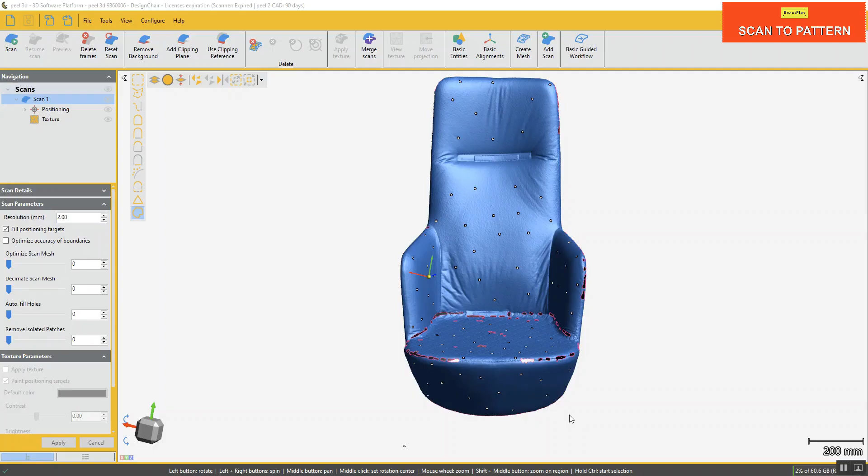Welcome to this video in which I'm going to show you how to take a scan from your peel scanner, send it over to your peel 2 CAD software, and then send that information over to your ExactFlat software.

So first of all, I have my scan here, but before I send it over to peel 2 CAD, I'm going to decimate my scan mesh, which is going to allow the smaller triangles to become larger in areas where I don't need as much detail. In other words, the triangles are going to be larger and there's going to be less triangles, which is going to reduce my file size by a lot.

Okay, so now that it's done, I am ready to send it over to my peel 2 CAD software. In fact, I can even delete my scans, and then save this as a different name, underscore P2C for peel 2 CAD.

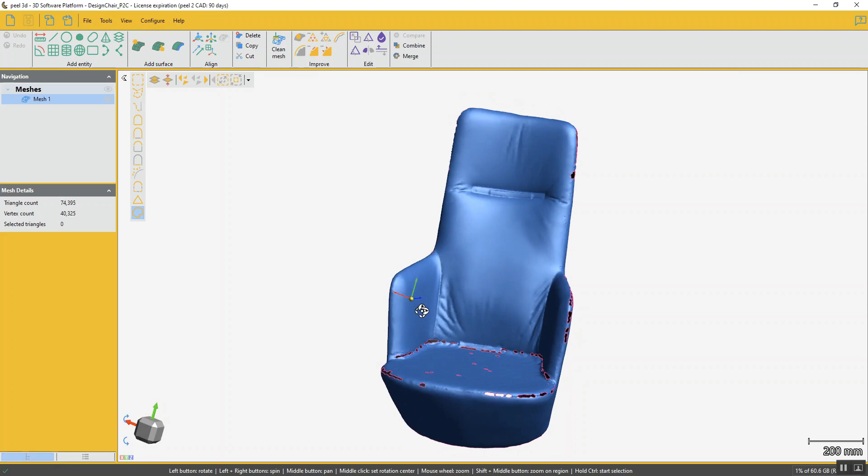Okay, now that I'm in my peel 2 CAD software, I'm going to first clean my mesh. This column is showing me all of the triangles that are affected by different things I can fix, like spikes, narrow triangles, and creased edges.

If I'm ever not sure what any of these mean, I can click on the help section, and it's very useful for when you're doing a certain action. Here I'm cleaning the mesh, and right here it talks about different things on how to clean the mesh.

Okay, so I'll click on apply, and then OK.

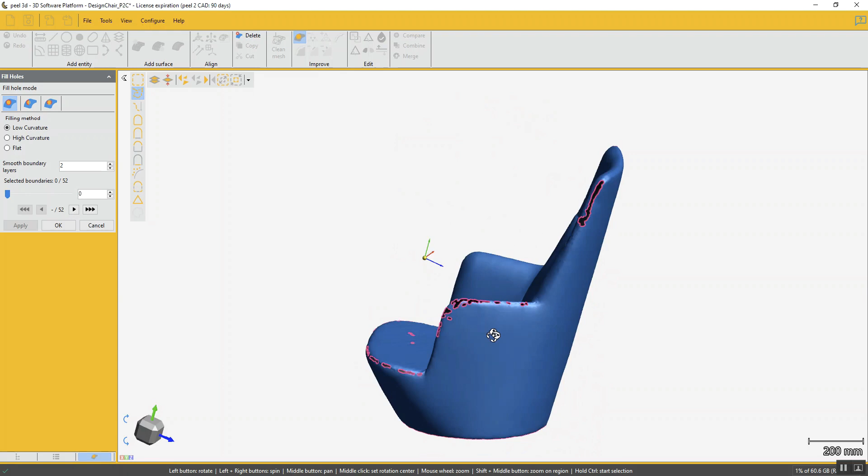Next thing I'm going to do is fill in these holes. So I can click on fill holes, and it looks like I have 52 holes that I can fill. Now if I move the slider bar, it's going to fill in the smaller holes first, and those are indicated by the yellow holes. As I go higher and higher, I'm filling in more and more of the holes. I don't want to fill in the bottom one, because I'm going to be using that later for my alignment.

So I'll just click on apply, and then OK.

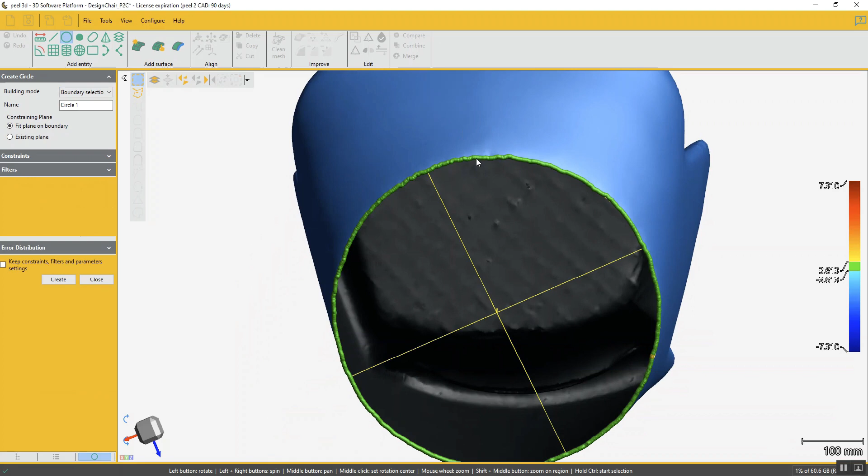All right, so next thing I'm going to do is create a circle to use for my alignment. And I'm going to use the building mode of boundary selection. Then I just click on the boundary or the edge of the scan, and click on create.

Next, I click on plane to add my plane. I'm going to use triangle selection for my building mode, and then boundary selection for my selection tool. When I use boundary selection and click on that boundary, it highlights a row of triangles along that boundary, so those are the triangles I'm using to create this plane. In other words, the circle is going to be on that same plane, because that's how I made the same circle using the boundary.

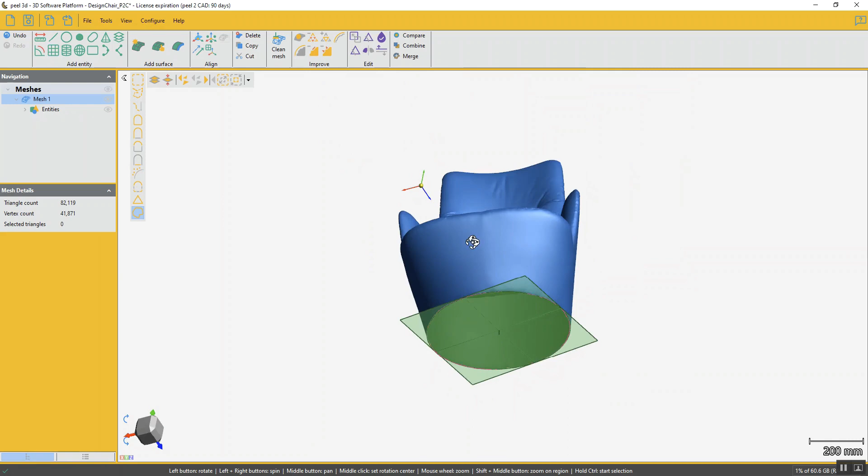All right, next thing I would do is create a line of symmetry or a plane of symmetry. I do that by going to plane, and my building mode this time is going to be mesh symmetry plane. My options are to either choose plane 1, which doesn't really make sense here, or draw a line or pick 3 vertices. So I will draw a line approximately down the middle, but the software is going to do the rest of the calculations using the rest of my scan.

Okay, so that yellow plane is actually where my symmetry plane would be. I can click on create and then close.

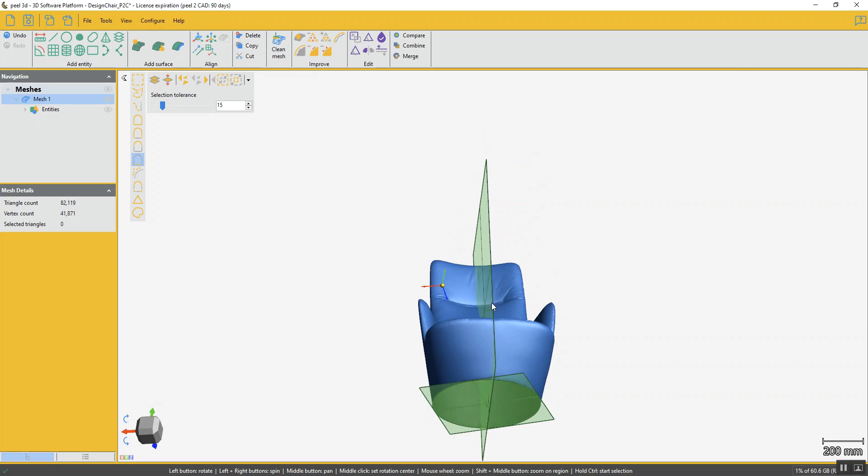All right, so now that I've made my circle and my 2 planes, I'm going to move my origin down to the bottom of the hole. I do that by clicking on Align to Origin.

And then I restrict different entities. So my circle 1, I'm going to use that as my origin XYZ. Then my plane 1, I'm going to use that as my plane XY. And lastly, my plane 2, I'm going to constrict that to my YZ plane.

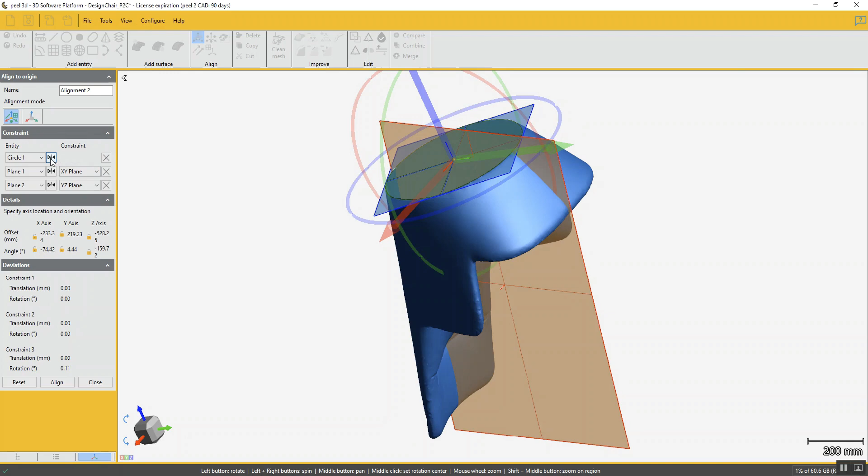Now, as you can see, my part is kind of upside down. I want my Z to be pointing the other way, so I can click on the flip button here under circle 1. Oh, and I can't actually, because that's the origin XYZ, but I can click my XY plane to flip that, and then my plane 2 to flip it the other way as well.

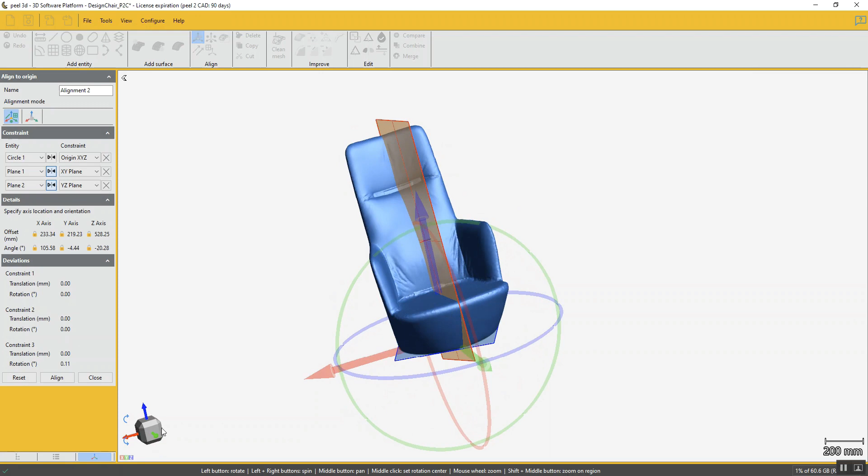Okay, so now at this point I can use my cube to be able to see different points of view, and that's going to be really useful for when I'm cleaning.

All right, so at this point, I'm ready to start cleaning my mesh a lot more. There are certain things I know for sure I want to clean up, like I don't want this little indentation here. So I can use my rectangular selection, hold down the Control key, and click and drag. Then I click on Defeature, and that smooths that out there.

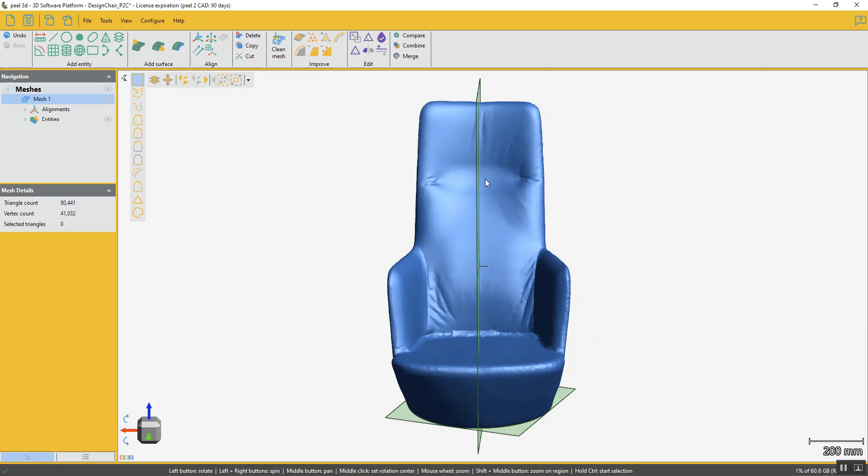But I still have little wrinkles here and there that I want to fix, so I can go bit by bit highlighting them everywhere. Keep in mind that the larger ones you highlight, there's going to be a little bit more issues and it'll take a little bit more time. So you want to do them bit by bit.

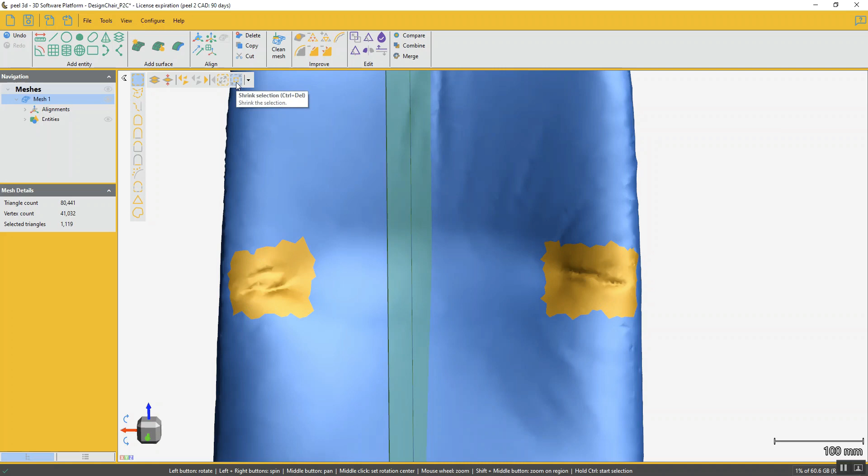Also, I don't know if you saw when I clicked on Defeature, it said irregularities were found within the selected part of the mesh. This is very common, especially when you have a blue triangle still hiding within your selected area. To fix that, just click on the Grow Selection tool, and then you can shrink it again if you wish to. You click on Defeature again, and it works the second time.

So I'm going to go around highlighting different regions, just smoothing everything around here. Now you can either use the paintbrush selection tool, which is what I'm doing right now, or you can use the freeform selection tool.

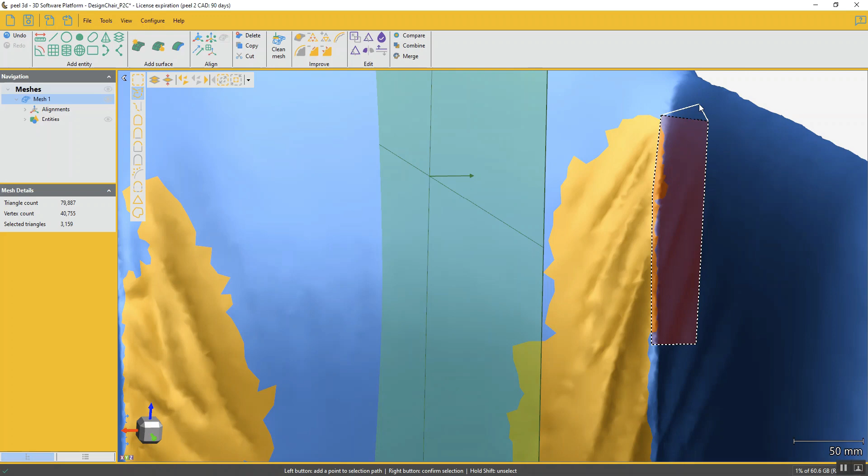I'm going to make sure I don't highlight my corner here, and I do that by hitting Control and Shift at the same time. While holding those down, I do my left click everywhere where I want to unselect. Before I let go of Control Shift, I do a right click. So I can hit Defeature, and it's much smoother there.

Another way to clean things up is by creating holes and then filling them in depending on their form. In this case, I'm going to use the similar normal tool, and I'll click on this planar area of the bottom seat, and it says unable to create selection with current vertex. In order to allow it to select that region, I'm going to raise my tolerance up, and then it's selecting this region. The reason it wasn't selecting before was because it didn't consider it very planar-like until I eased up on it.

I still have some blue regions here that I'm also going to want to delete, so I can just grow that selection, and maybe just a few more just to make sure, and then I can shrink them back down.

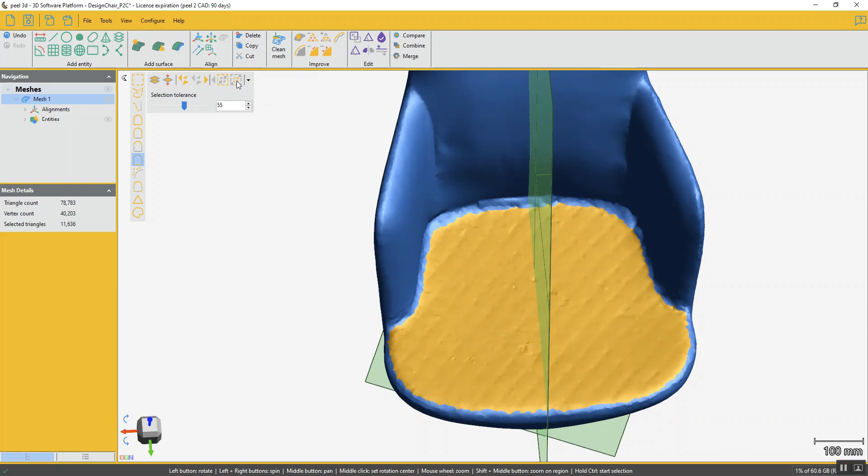Now in this case, I kind of just want to select the flat region, but I do want to select it all the way back to the edge here. So for that, I'm going to use my freeform selection tool and highlight a little bit more around here. And it looks like I highlighted too much. I hit Control and Shift and just deselect once again, right click. And now I'm ready to delete.

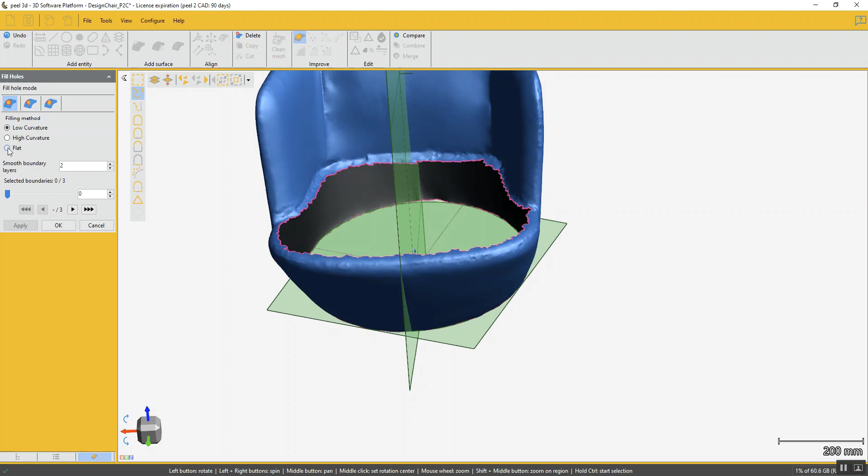I can also hit delete on my keyboard as well. So if I want to fill that hole, I can either do it with low curvature, high curvature, or flat method. I'm going to choose flat since I do want this to be pretty flat there, and I click there. It gave me a smooth boundary layer of two layers, which means there's about two rows of triangles in which it blends in. But I actually don't want to do that, so I'm going to hit undo, and then I'm going to go to 0 here. You can play around with that number and see which one fits your need best.

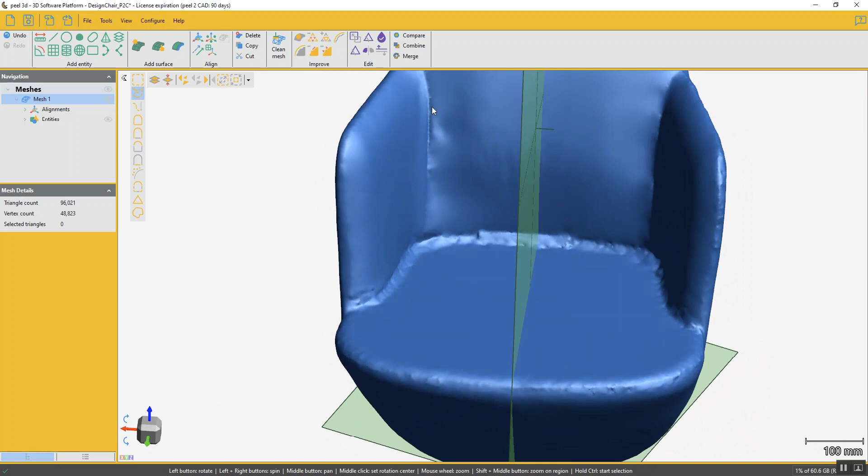So now I'm ready to clean up a little bit more around the corners here, because when I cut these pieces into different fabrics, I'm going to want to make sure that I have a nice smooth cut right along here. But as you can tell, it's a little bit wrinkly.

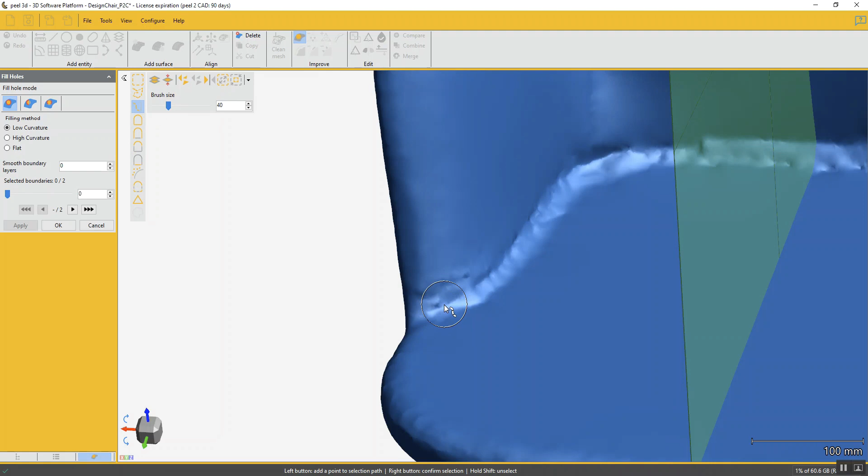So in order to fix that, I can go to my Fill Holes tool. Even while I'm in the Fill Holes tool, I can still select certain regions, so I'll use my paintbrush selection tool. Holding down the Control key and scrolling up increases the size of my paintbrush, so I bring it to a size that makes sense there, and then I highlight the regions that I'm about to delete.

If at any point this plane gets in the way, or you don't want to see it anymore, you can click on your project tree, the drop-down arrow for entities, and then hide your plane 1, plane 2, and circle 1. You can also hide them or show them all by opening the entity's eye.

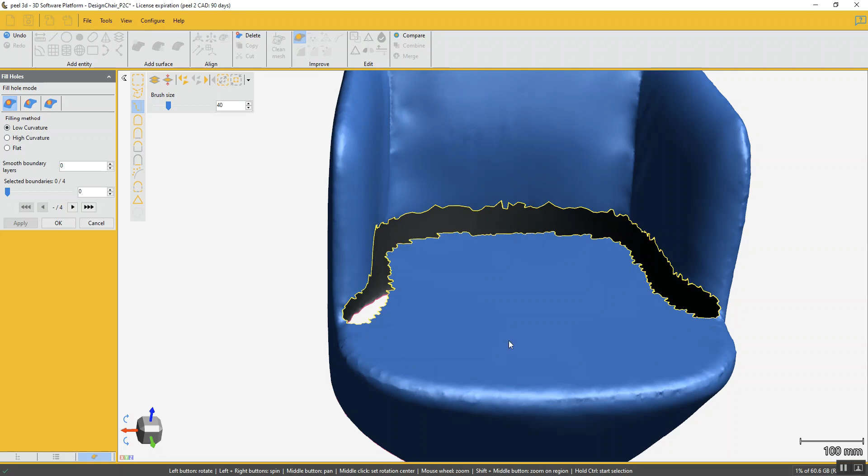Okay, so going back to my filling holes tool, I can click on delete, and then I'll use low curvature to fill in this hole. So there it's much smoother than before, with a little bit of stuff I can still fix.

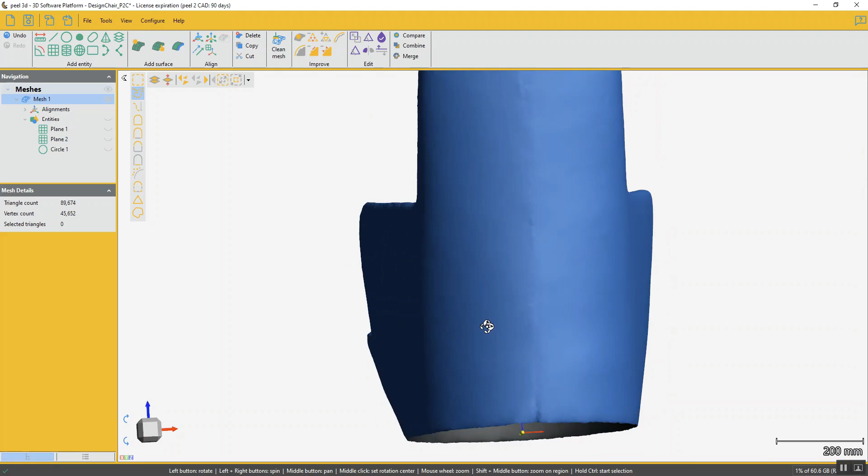So I can keep on going around and doing a bunch more defeature tools. I'll use my freeform selection for that. And I want to make sure that I do the same thing for the zipper in the back.

Now notice when I do these defeatures, I'm trying not to make them super giant. That's because with the larger a defeature selection you've made, the longer you're going to be waiting.

It's a little hard to see, but there is a little seam that was here as well, so I'll defeature that too.

And it's starting to look pretty smooth now.

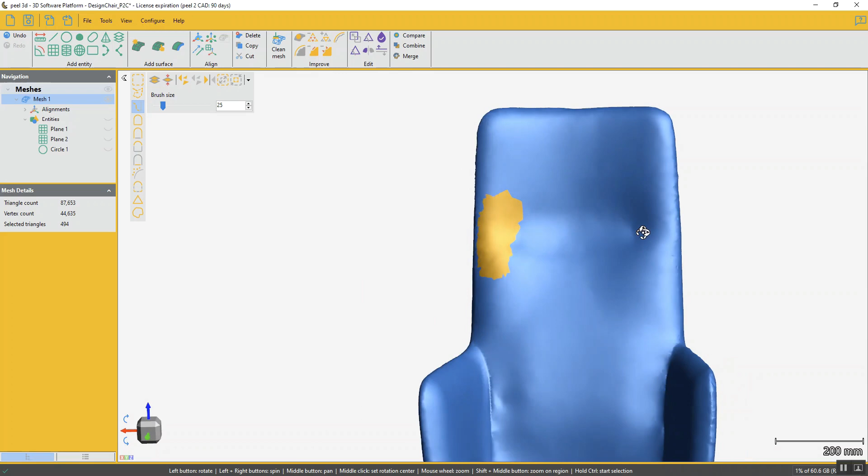Now I do know that I'm going to also want to smooth out right along here, because that's where I'm going to cut part of my cloth. So I can either choose defeature or fill holes. You can play with each one and decide how you want to do it.

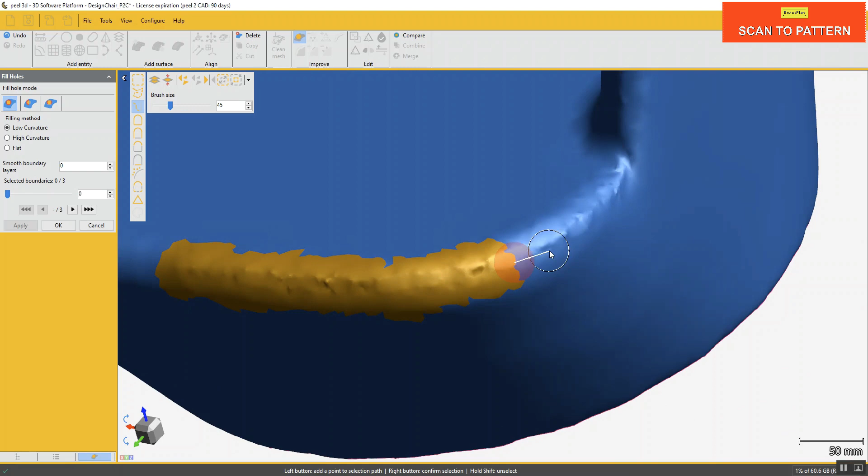Let's say that you're in the middle of clicking with your paintbrush selection tool and you realize you don't want it to be that thick, you want it thinner. You can actually hold down your control key and scroll down on your mouse, and it makes the paintbrush thinner there.

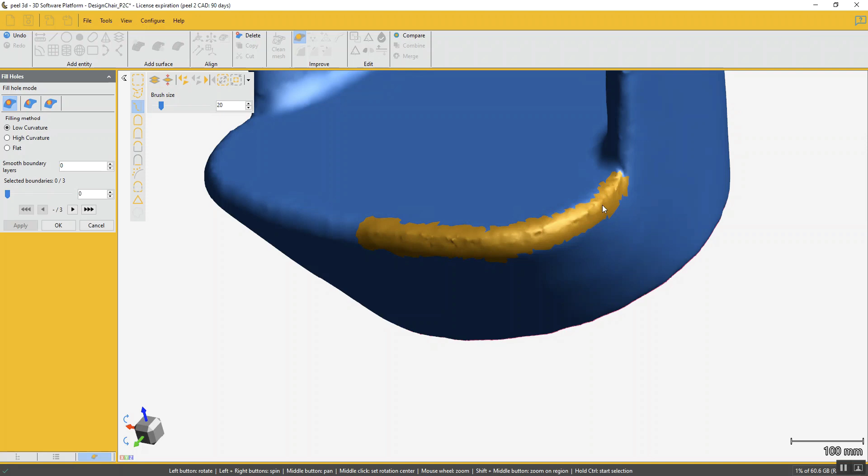So the rest of the stuff I think I'm going to do with the defeature tool.

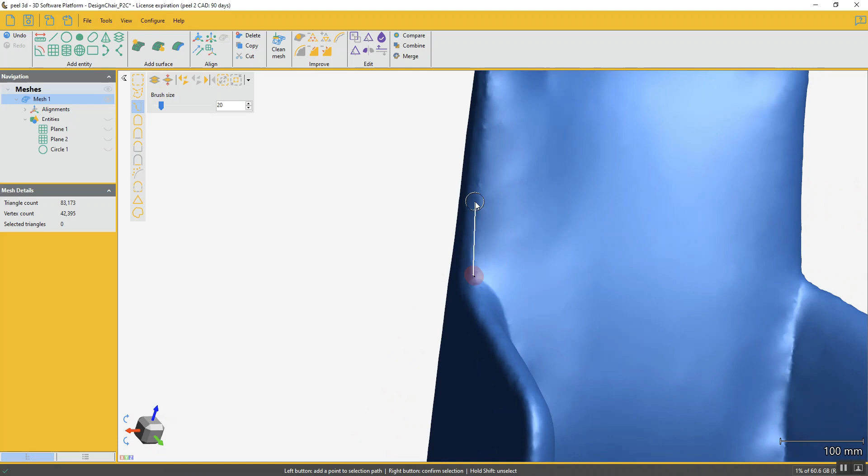Now, if at any point you think that you've lost some information, you can always click on undo and then try your hand at it again.

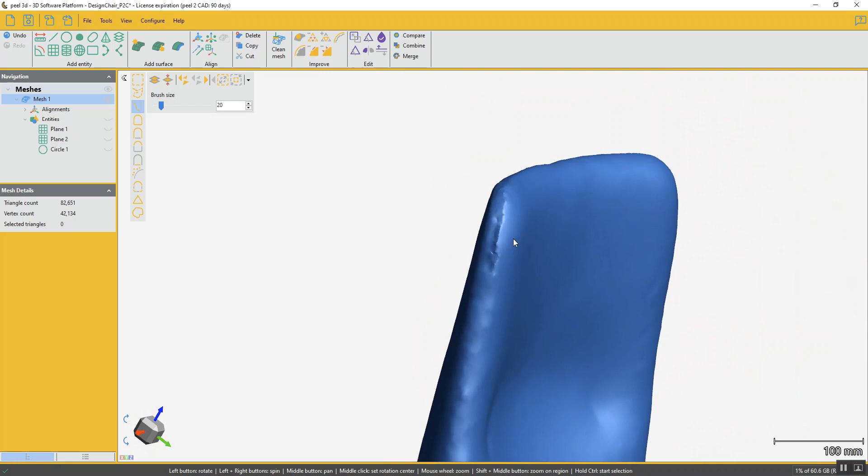And if you're not sure, you can also use this tool called compare, and you can compare to before defeature, so you can see by how much it's varying. This blue represents a negative number, showing that you have less material, or negative material, than what you used to have before.

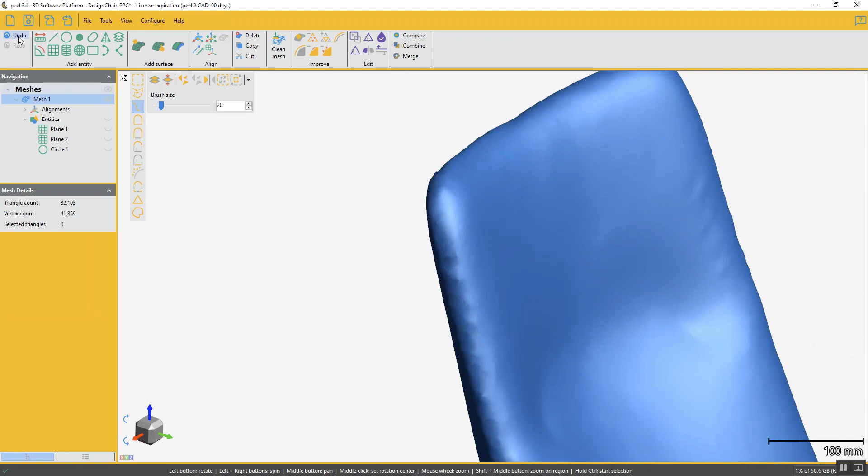So if you feel like that number is a little too high, you can close it, click on undo, and then just fix your selection again.

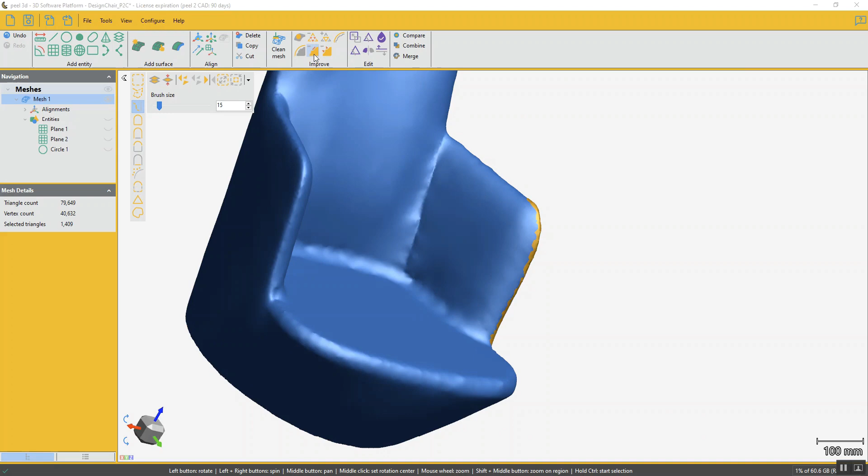Looks pretty smooth now. Just be sure that wherever you're going to put your seam has been defeatured and is nice and smooth.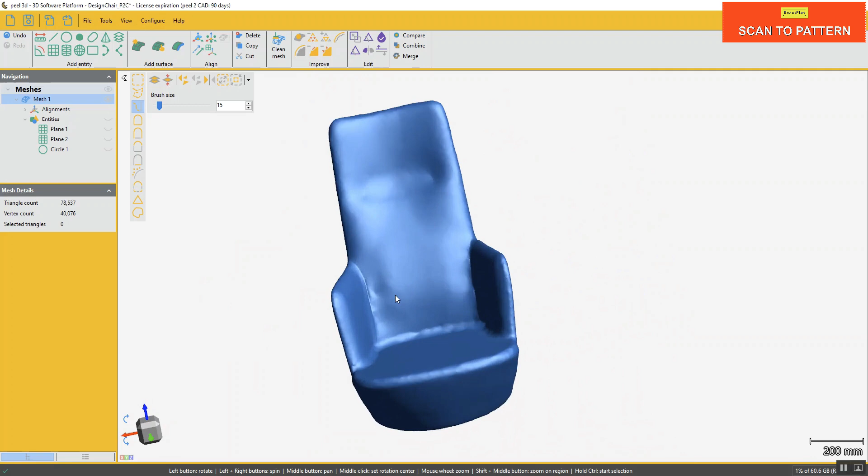All right, looks like we're still missing some smoothness here and here.

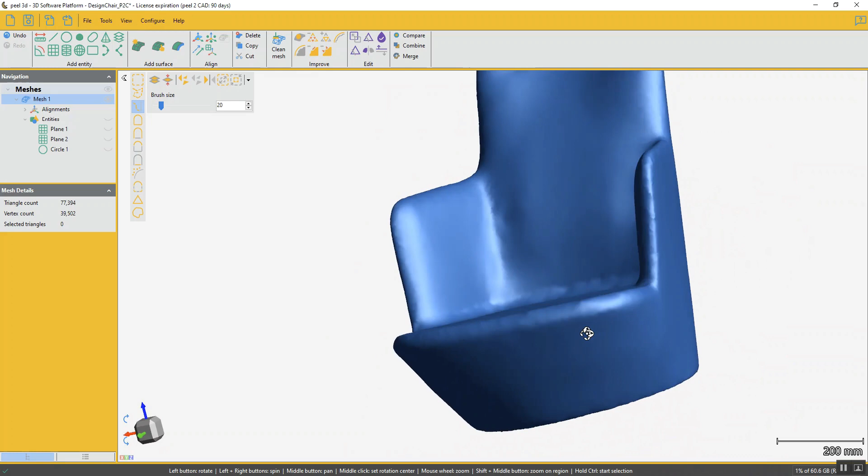Okay, looks pretty good. At this point, we can also do a smooth mesh.

So I'll go all the way up to 100. I'll allow my max deviation to be 0.1 millimeters. And just to better see what's going on, I can click on triangles and wireframe on my display. The deviation might be so slight we might not even see it, so let's see what happens here.

We'll click on preserve boundary, and we'll click on apply. So it was either already smooth, or maybe I already did it and didn't remember.

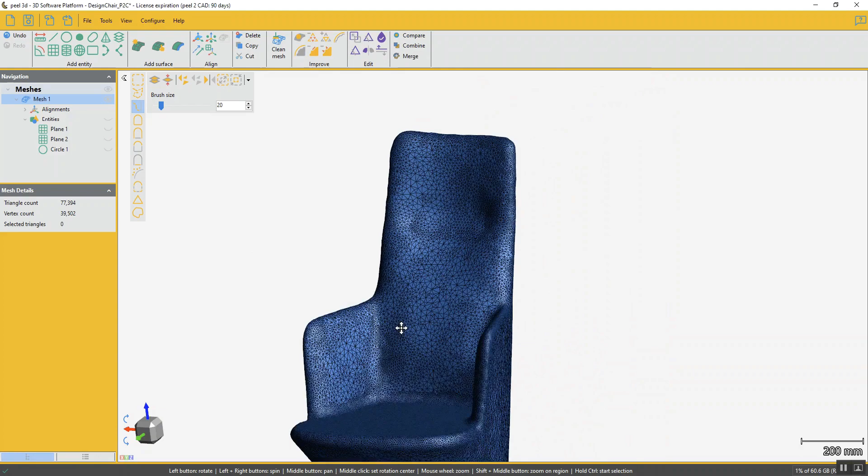Also, I know that I'm going to want to make this boundary at the bottom nice and smooth, and I know it's pretty circular, so I can actually edit it so that it becomes a perfect circle. I can do that by clicking on Edit Boundary, and then choosing Fit to Entity.

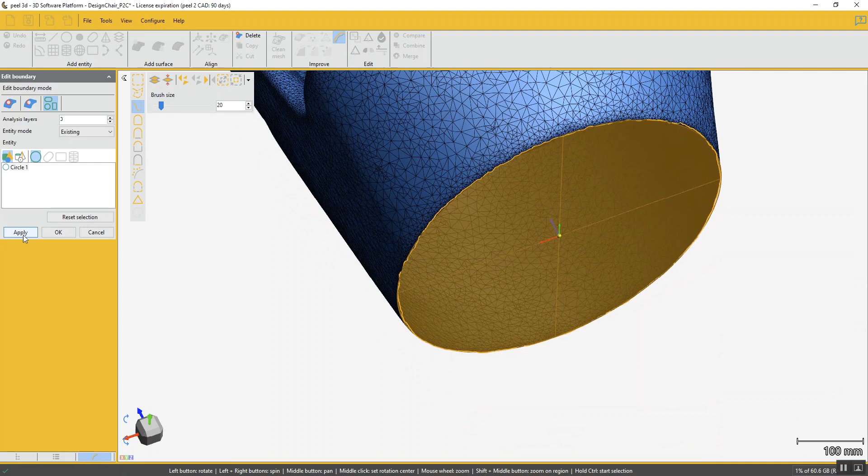Either I can use this boundary as my circle, or if I've already made a circle before, I can choose that circle to make my boundary fit to that entity. So if I click on apply, then that circle or that boundary becomes a nice smooth circle.

Okay, so now that I've smoothed a lot of things out here, what I'm going to do is, well first off, I can see that I have about 75,000 triangles, which is a good amount of triangles for my ExactFlat software. So at this point, I can start cutting my chair.

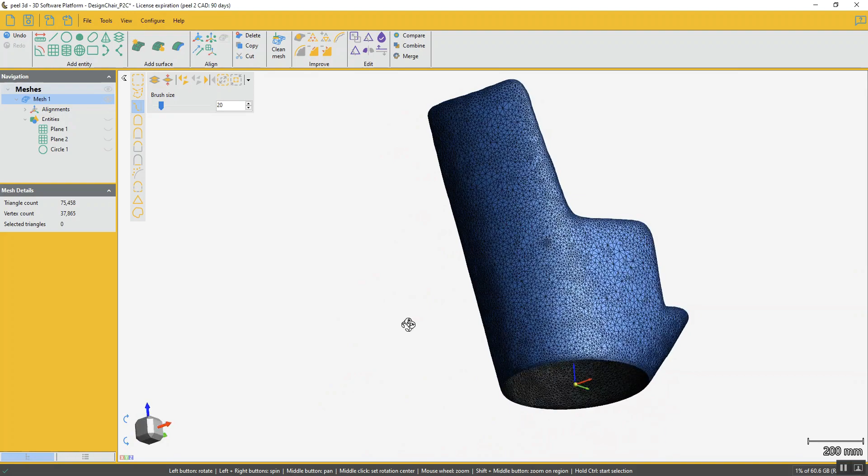So since everything's pretty smooth, I don't see any more spots where I can clean up. Then I'm ready to start cutting the pieces.

Now, whenever I do something that's pretty drastic, like cutting pieces apart, I usually like to right-click and duplicate my mesh, so that I still have an original to work off of in case I make a mistake within my duplicate.

So I'll start working on this duplicate, and in order to do that, I'm going to have to create some curves to separate the different pieces. So first I'll go to create a curve, and I'll just start clicking along where this curve should be.

Whenever I'm coming around the corner, I like to put a few more dots on there. And if I ever feel like I'm actually straying a little too far, I can click on any of these dots and move them back or forward wherever they need to go.

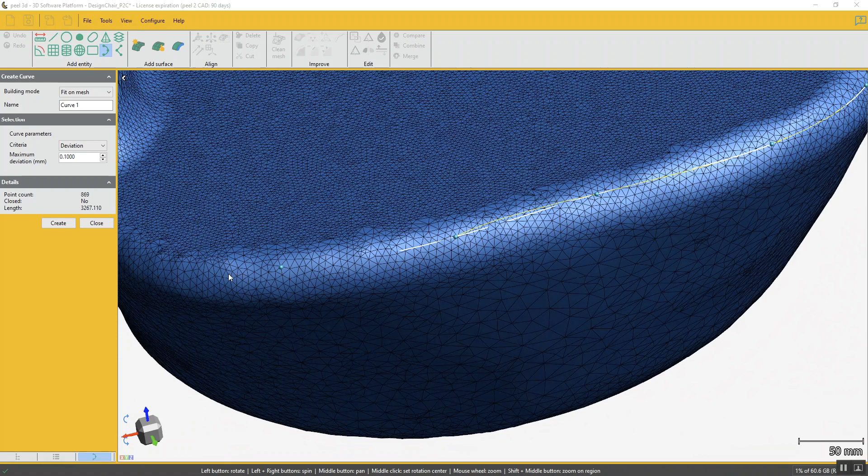Okay, since I've already aligned my part, I can click on my cube to see if things look evenly from one side to the other. So if I feel like maybe one side is a little too far, I can adjust everything.

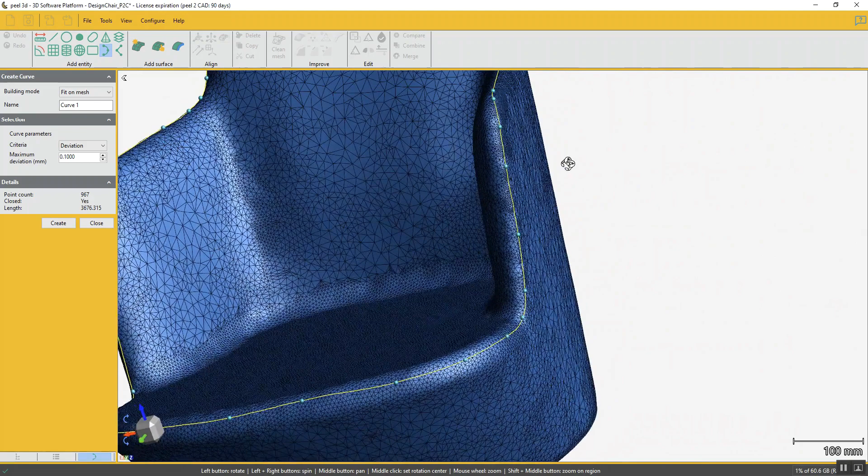Or maybe if something's a little too far on the other side, I can adjust it as well.

Okay, so everything looks pretty even now. I can click on Create now.

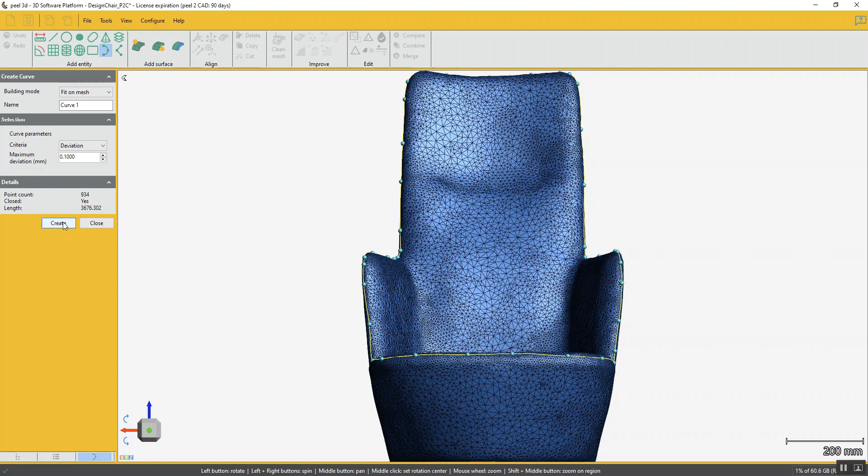If I do want there to be an allowable deviation as well, I can increase my maximum deviation allowance too. So instead of it fitting exactly onto the mesh, I could say I want a deviation of 0.5 millimeters, and that mesh will become a little bit smoother. So I'll put maybe 1 millimeter there, and now my mesh is smoother there on those parts of the curves. I can click on Create and then Close.

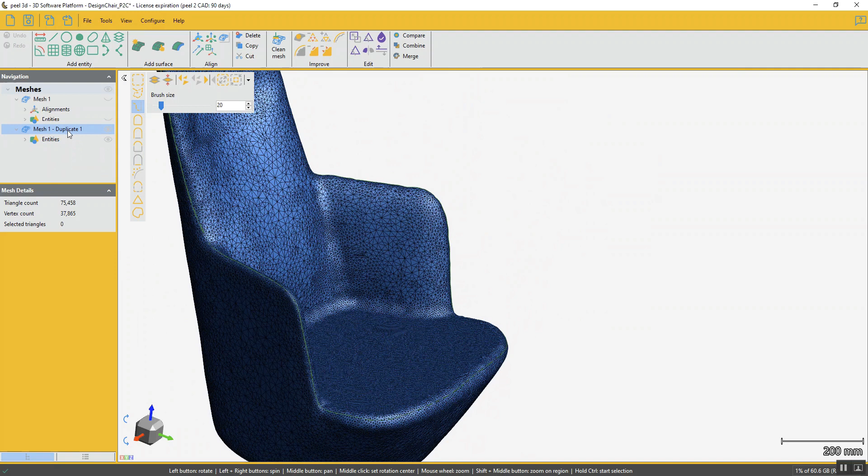So now I have one curve that splits the top part away from the bottom part, but I haven't split it just yet. So I have to click on Cut Mesh by Curve, choose Curve 1, and say keep both parts, the top and the bottom. Click on Apply and then OK.

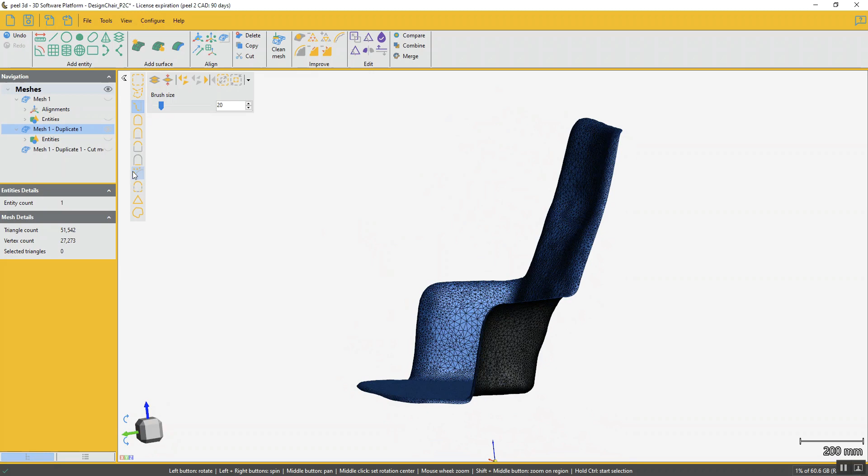And now I have my Mesh 1, Duplicate 1, and my Mesh 1, Duplicate 1, Cut Mesh by Curve. So just to make things a little bit easier, I'm going to call this one Top, and I'm going to call this one Bottom.

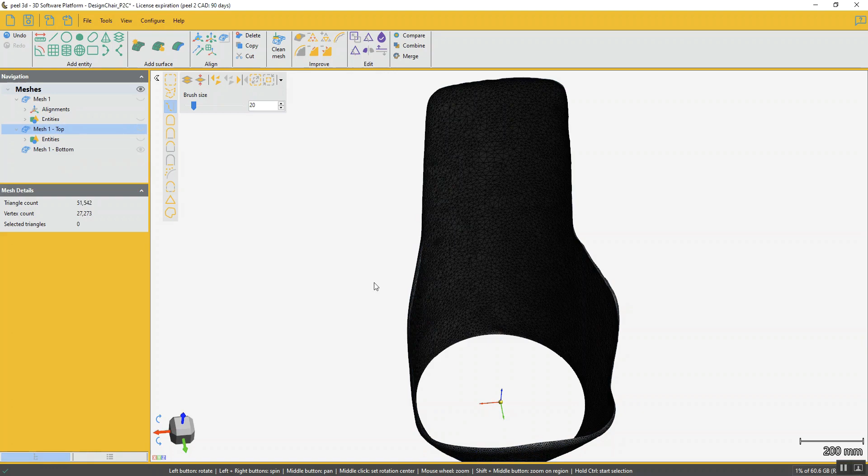So I can continue working from my top section. And the way you know that you're working on something is because it'll be in blue on your screen. If you have the eye closed, you won't be able to see it, and you might even see something else. So even though I'm working on Mesh 1 top, I can't see it because my eye is closed, and I only see Mesh 1 bottom, even though it's not active. So if I were to try to delete something here, it wouldn't let me. It would only bring it back to Mesh 1 top.

So I'll clear the selection there, and then I'll start cutting what I need to do here. Now, even though I've smoothed this top part out, I can still decimate some of my triangles there because this is a planar area.

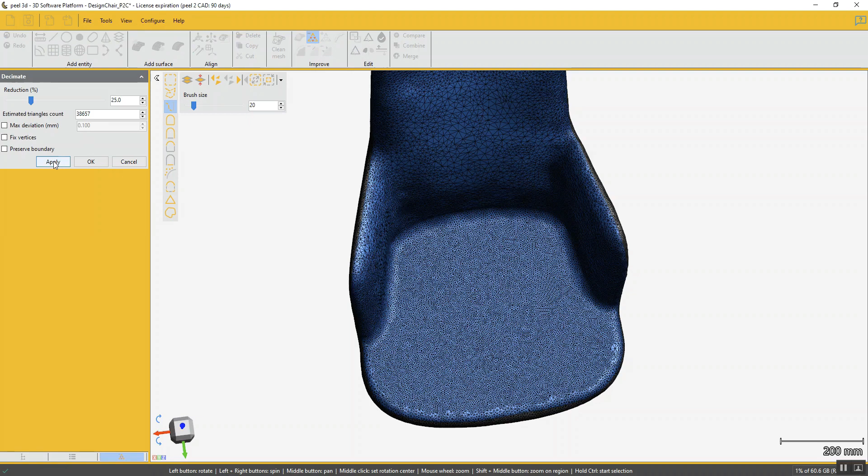So I'm going to click on Decimate, and right now it says 38,000. I'm going to just choose Apply to see what it does. And so it decreases the number of triangles there. I actually don't want to do that because I also wanted to keep my boundary preserved.

So let me hide this and show you exactly what I mean. When I click on Decimate, I have the option of preserving my boundary. In other words, this curve is not going to change, that cut area right there. So I also know that I want my max deviation to not change by too much. So I can leave it at 0.1, or I can change it if I'm willing to do so, say 0.2, something like that.

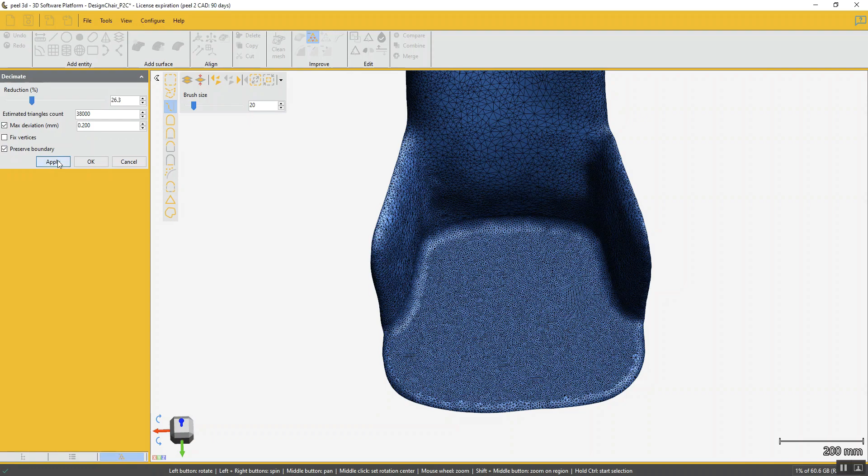38,000 triangles, apply, and now I have larger triangles in this region. And then OK.

Okay, so continuing on, I can keep on cutting this chair into different pieces. I am going to click on the outermost edge of where this corner should be, and then I'll click along where I want my seam to go.

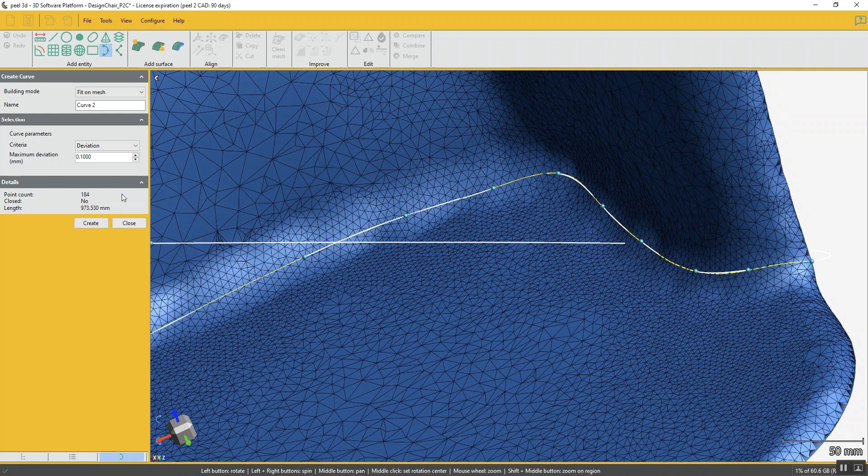Now remember when I defeatured this, I did get rid of some detail, and that's okay, because we really just want the cloth where it's going to be, and we want this area to be smooth as well. So I'll choose 0.5 millimeter, or actually we went with 1 previously, so we'll stick with 1 there, and then we'll create the curve.

Close it. I'll cut the mesh by curve using my Curve 2 that I just made, and I'm once again going to keep both parts. Click on Apply and OK.

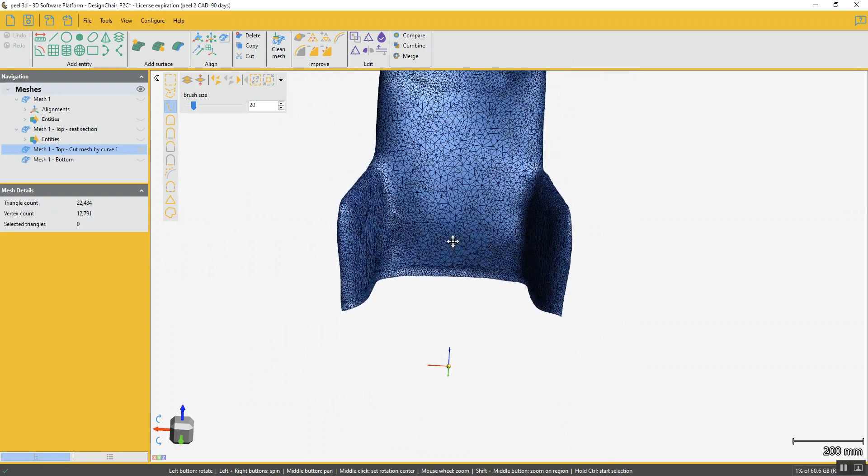So now my Mesh 1 top is not just my Mesh 1 top, but it's also my seat section. Hide that, and I'll work on this top part. I'm going to separate the two different arms. So here, I'm going to make another curve, and I'm going to separate that curve right along where the seam would go.

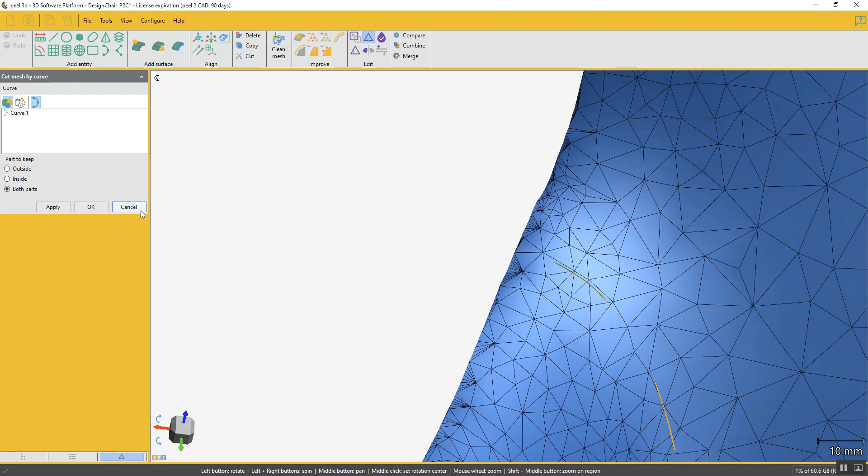Create, close, and cut. Keep both parts. So it looks like something I did with the curve, I might have either not gone to the end, or I might have made it a little bit too jagged or too smooth. So I can go back and delete that curve and create it again.

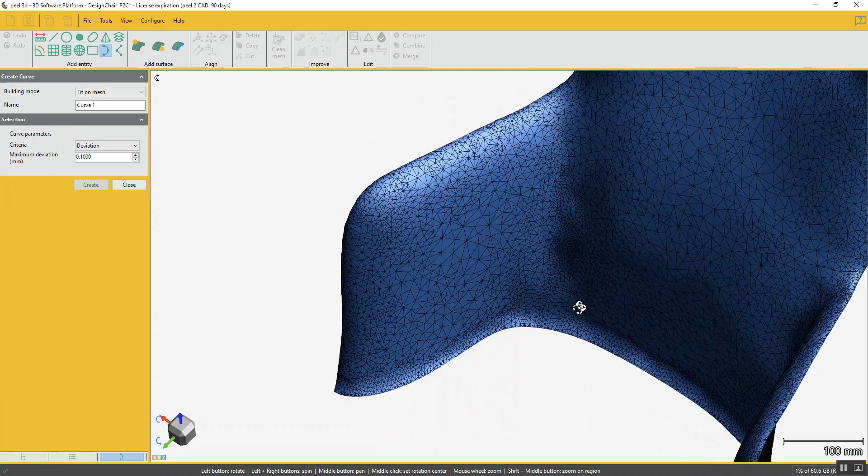I'll this time put a 0.5 millimeter, create it, close, and cut. I do want to keep both parts. Apply and OK. So now this one will be called my right arm section.

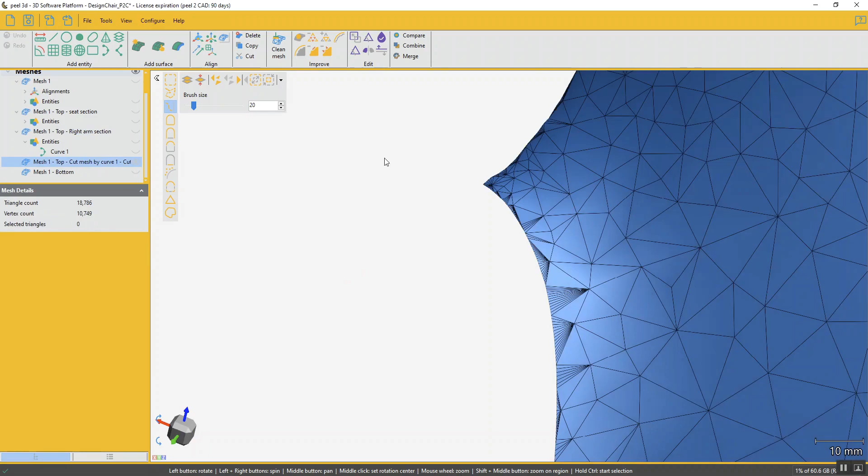And this one is ready to be split into two as well. Now, if I want it to be pretty similar to the other side, I should be looking at this section here and figuring out if I'm pretty close or not. Make sure I get all the way to the edge. Looks pretty good.

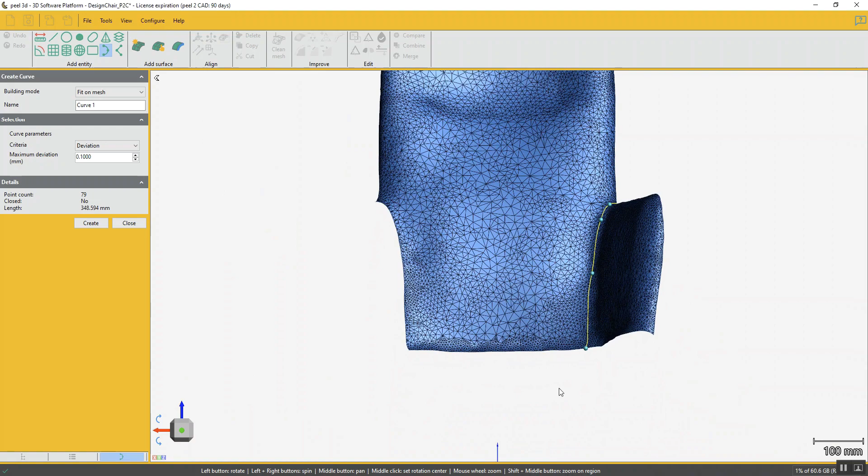0.5, create, close. Keep both parts. And now I can rename this one left arm section.

Lastly, I have this one to cut. And if you remember correctly, I actually already made a symmetry plane, so I can use that same plane to cut this mesh. But since I created that plane in a different mesh, I'm going to have to copy that plane over to my Mesh 1 top, this section.

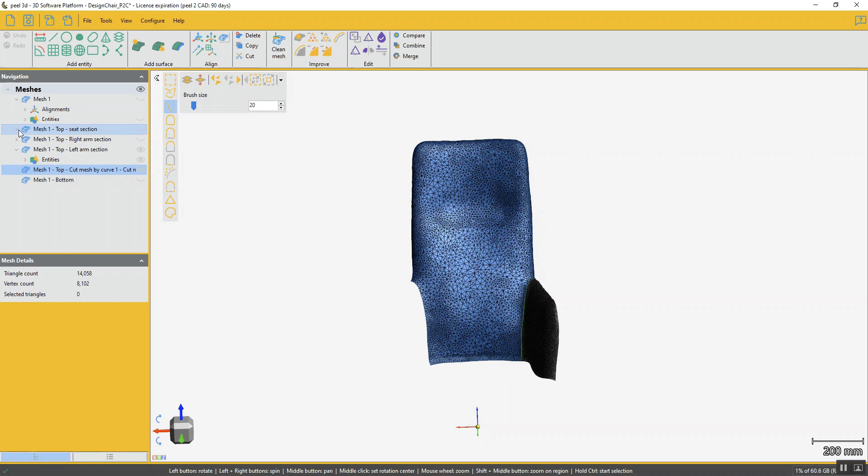So I go looking for it, and it was my Plane 2 in this one. And then I right click and choose send to this mesh. Now that I've sent it there, I'm going to be able to cut it in half, because now I have it here.

And I'm going to do that by clicking on Cut Mesh. I'm going to use Plane 2. I'm going to keep both parts and just preview where it's going to cut. Right down there, that's good. And then OK.

So now I can look at this one, which is my Mesh 1 top, and I'm going to rename this Mesh 1 top left side.

And this one's going to be my— oops, I forgot to erase the cut mesh by curve section part. And then mesh 1 top, right side.

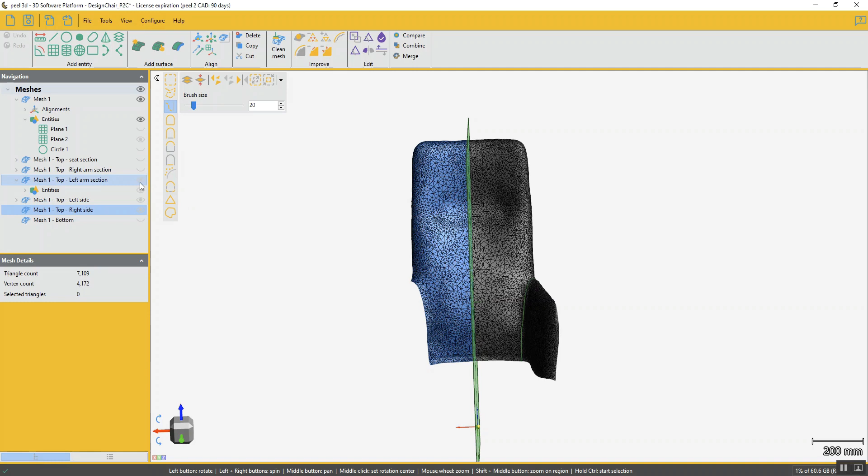I still want to cut this one down the middle. So I'll bring it down to a good view, and then I'll create a plane using my draw line plane creation mode. I hold down Control and just draw a line right across, then click Create and close.

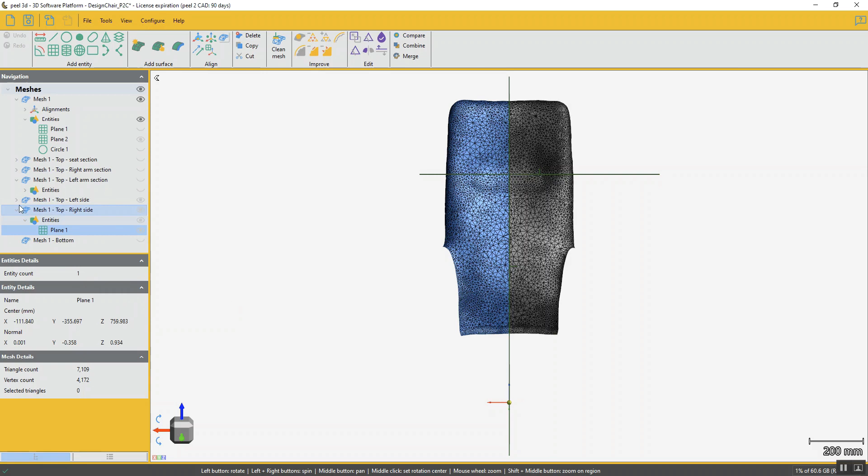Now I also want this same plane to go over to my top left side. So just so I don't forget to do it later, I'm going to send it to my mesh 1 top left side. So now I have it here as well. So mesh 1 top left side, I'm going to cut it with my plane 1. Keep both parts, and OK.

I can rename this left bottom side, and rename this one left top side. It's a lot easier to work with things when you know which one you're looking at.

So mesh 1 top right side, that's this one here. We're going to cut that one with the plane as well. Right top side. Right bottom side. Okay, that section is done.

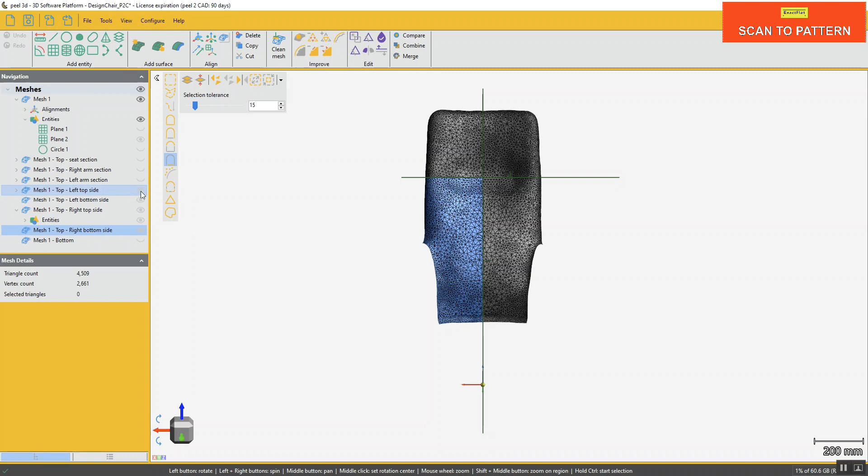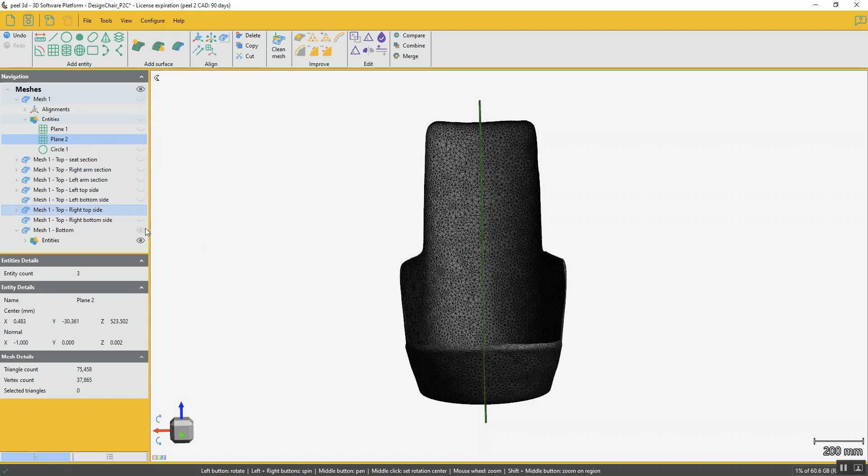Now I can look at mesh 1 bottom. Remember I had that symmetry plane, and I can use that to cut my mesh. So I'll use the cut mesh tool there. And I don't have that plane yet, so I'll have to bring it over. I'm seeing it here. Send to mesh 1 bottom, and then I can close that eye. And under mesh 1 bottom, I can now cut it with my plane 2. Keep both parts.

Mesh 1 bottom, left. Mesh 1 bottom, right. I still have one more cut to go, and that's going to be right down here, one line right here. And I know that since my part is symmetric, the cut that I do from this side can also be done on this side. So I really just have to make one plane to go right down the middle.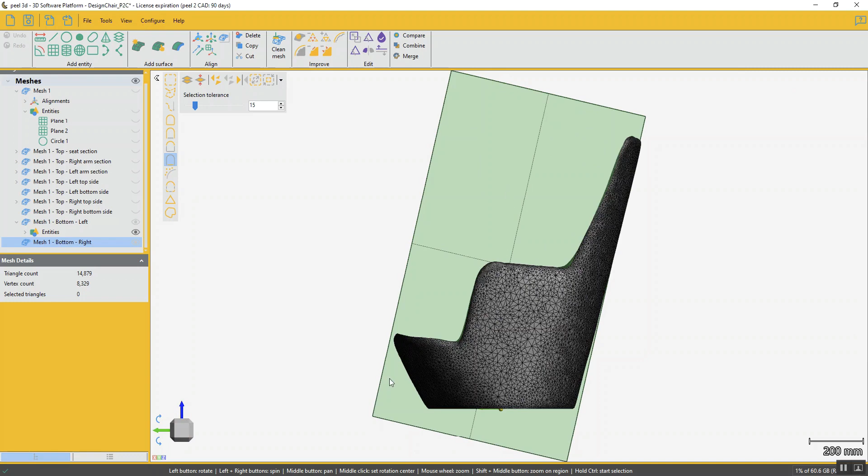Now instead of trying to get it perfect and make it aligned, I can also click on my cube, and I know that it's looking at it straight away. So let's look at our mesh 1 bottom left. We can draw a plane line and click from here down to here while holding Control. I click Create and then Close.

That was my plane 1, and I can forward that over to my mesh 1 bottom right. I'm going to cut the mesh with the plane. Keep both parts, preview it, yep. And then the same thing goes for the bottom right side.

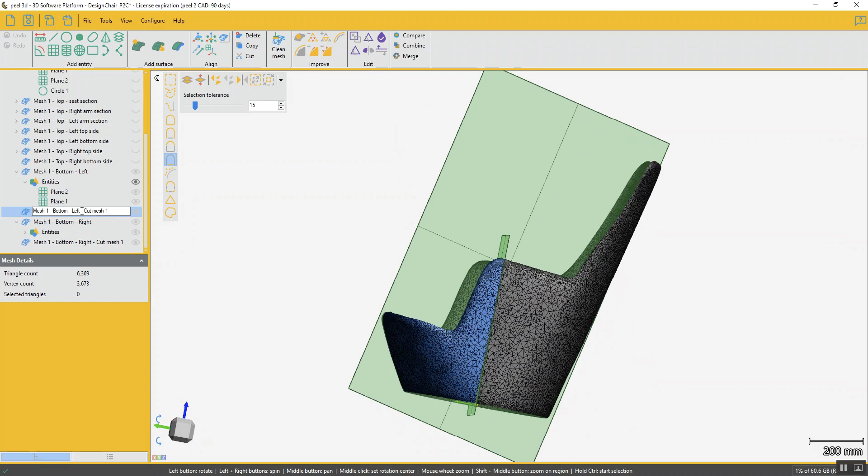I can call this left front. Right back. Right front. And left back.

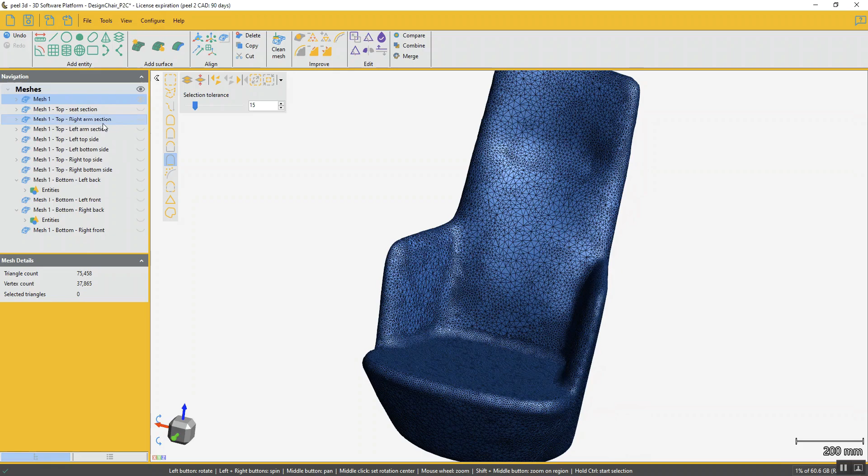So at this point I have my original. If I hold Control E, or I can also right click, Show Only Selected, I'll only see that one item and nothing else. So this is what I started with once I had finished cleaning it up. And then the next thing was my seat, my two arms, my back pieces, my all around the edges pieces. So I can show them all here.

Now I can either export them all one by one, but that kind of takes a long time. So what I can also do, instead of exporting them all piece by piece—which is something like this, click here and then do export mesh, that takes a long time—instead of doing each one, I'm going to do them all at the same time. In order to do that, I'm going to select all of these and combine them together with the Combine tool.

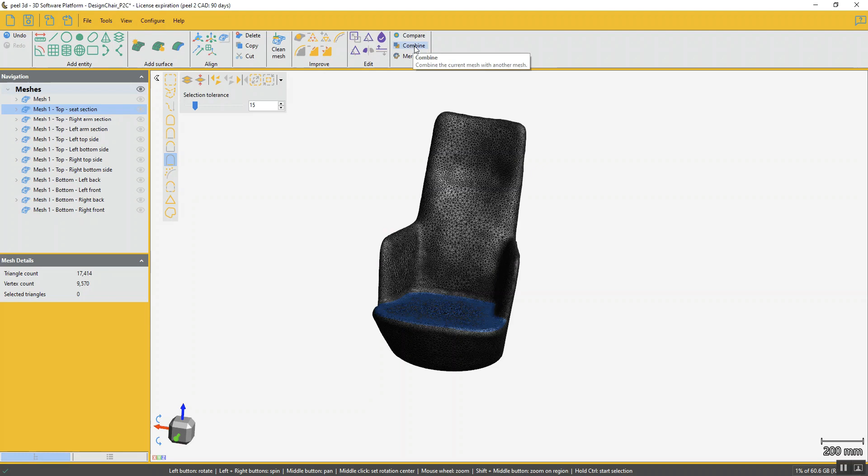So I select every item I want to be placed together, making sure I don't miss any. And then I click Apply and OK. And now there's a new thing in town called Combine 1. Although it looks like it's all together, it is still, in a way, separate. So that when I export it, I can save it as my OBJ, and then I can say Combined Design Chair.

And from there on out, I can send that into my ExactFlat software to be able to separate all the different pieces. Thank you for watching.